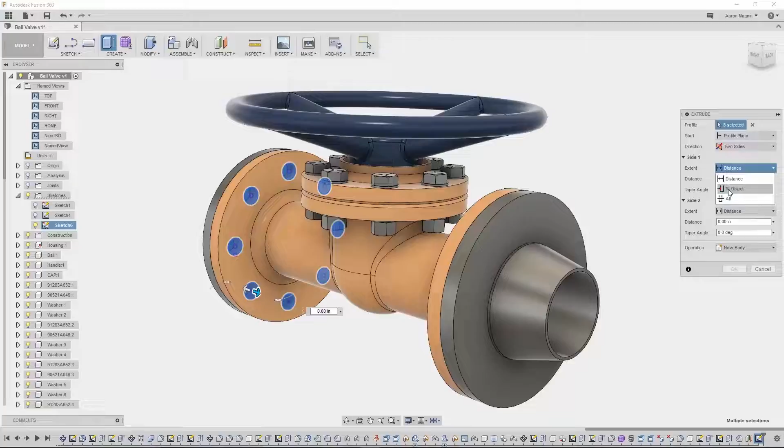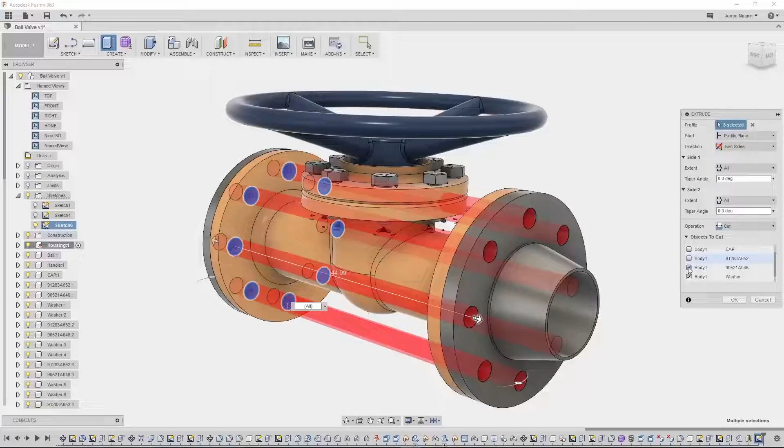To avoid doing this feature twice, I'll have this go in two directions and through all. As it starts to preview, you can see there are a couple of unintended cuts through the valve housing, the cap, and many you can't even see. To avoid these cuts in the past, I would either need to do this in two separate features or hide everything I wanted to avoid cutting. But now, thanks to the Objects to Cut toggles, I can avoid cutting any of the parts I want to leave untouched. You'll find Objects to Cut in revolves, sweeps, and lofts, so you can avoid tedious hide/show steps and make those features more efficient.

But even those tedious hide/show steps just got a lot easier thanks to some amazing new selection tools. Select by Name is especially handy in this case because all my McMaster hardware starts with 9. Select by Boundary allows me to make a handful of boundary shapes, and I can select inside, outside, or even intersecting models.

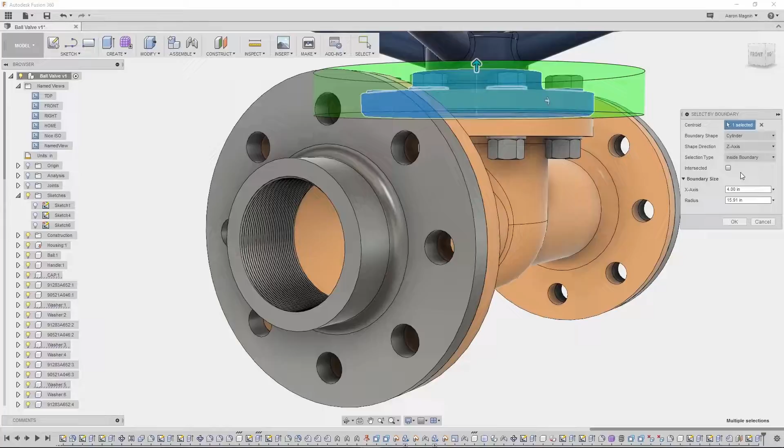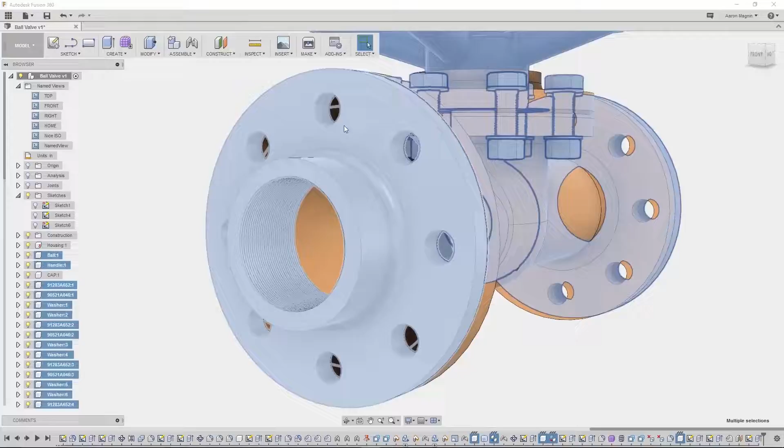I've already used Select by Size to remove hardware and small bits from an insanely over-detailed design by our very own Jay Tedeschi. There are also selection priorities, which can be set to bodies, faces, edges, or components. I'll use components here to get just the housing and the cap, then use the final selection tool, Invert, to select everything but those two items. Hitting V will hide everything but the housing and cap, making the next design changes simple. A great tool to have.

But let's pass over to Bryce now to see what's new in the CAM workspace.

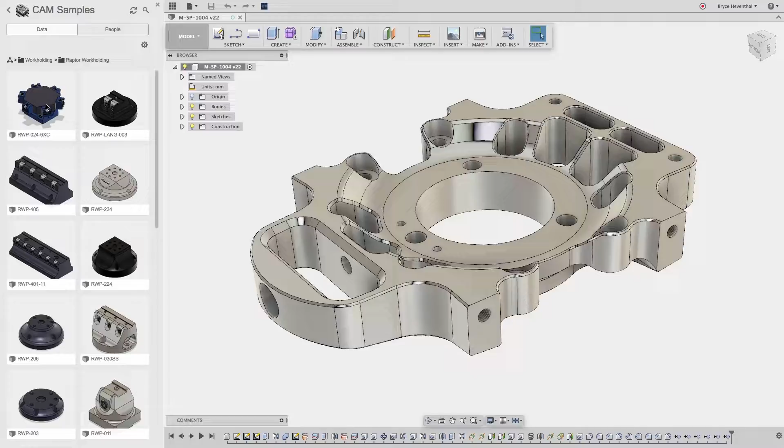In this Fusion 360 update, we have a lot of big enhancements to the CAM workspace inside Fusion 360. To start off, we have added different samples of work holding that can help you with your CAM setups. We have added examples from 5th Axis, Raptor, Chick, and more. We will be adding even more work holding samples to this folder as they become available, so keep checking back in. Now start placing your parts in the vise you are using in your machine to make sure there are no collisions with the way you are fixturing your part.

Next, we've added 3 new tool types to the CAM tool library. In this update, we can now create and customize tapered ball end mills, face mills with a corner radius, and thread mills. Now our next CAM enhancement brings probing to Fusion 360.

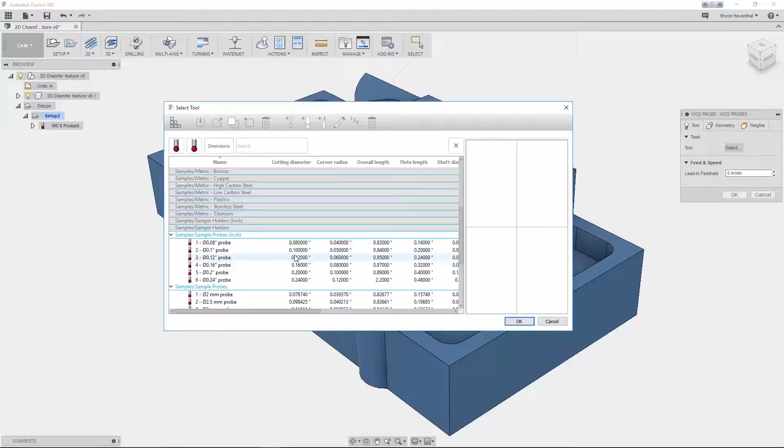Probing can be used to set your zero points on your part and also can be used to find coordinates on your part. First, we will select our probe from the tool library. Probing is something you do at your machine. Next, let's select the probing surfaces. Then Fusion 360 will determine our probing type depending on our selection. You will also need to make sure probing has been added to your post-processor.

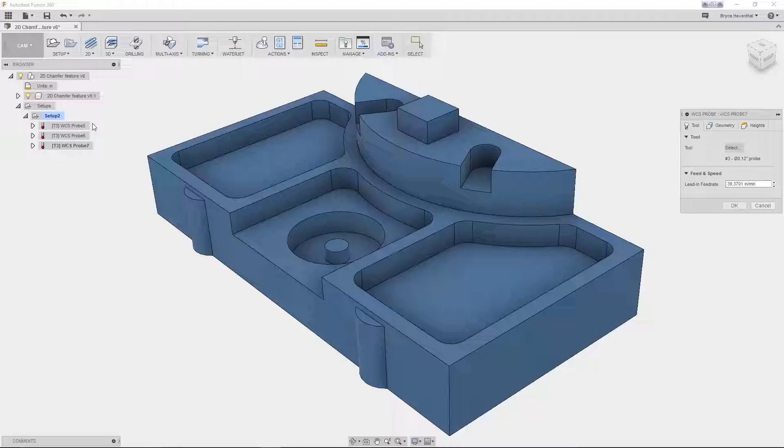Now, depending on the selection, you will get different probe types to locate different points. In this last example, we will choose to have the probe type of an XY circular hole with an island in order to avoid this center extrusion. Let's change the clearance to ensure we don't collide with this circular boss. I can set the clearance to specify the distance that the probe will stay clear from the selected feature. This is the point it rapids to at a distance from that wall.

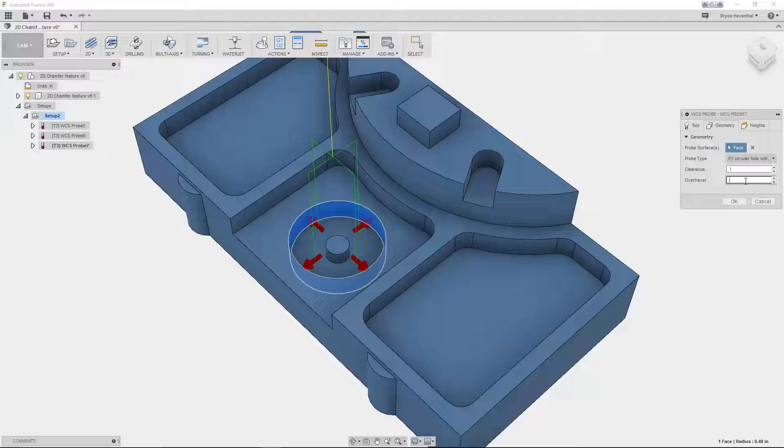The over travel is the distance the probe is allowed to move to search for a contact. We don't want to damage the probe, so if the probe travels the specified distance without finding the wall, it will stop.

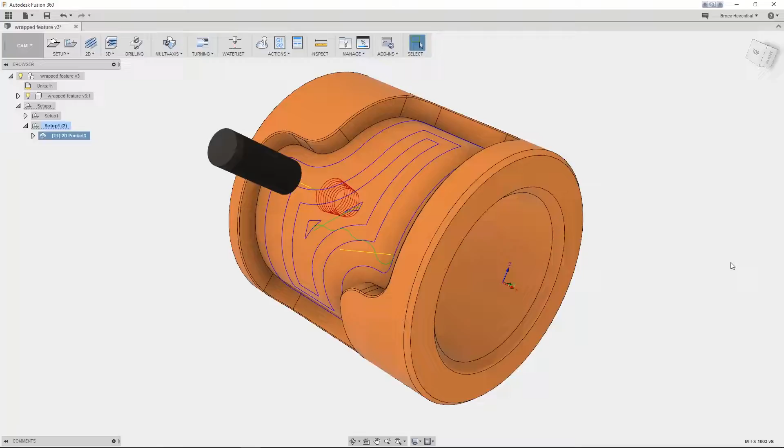Now let's talk about some of the new 4-axis simultaneous toolpaths in this Fusion 360 update. This toolpath will be essential for machines with a rotary axis. We now have a wrap option in the 2D adaptive clearing, 2D pocket, and 2D contour toolpaths in order to wrap around cylindrical objects. The wrap toolpath is a new option on the geometry tab of these toolpaths.

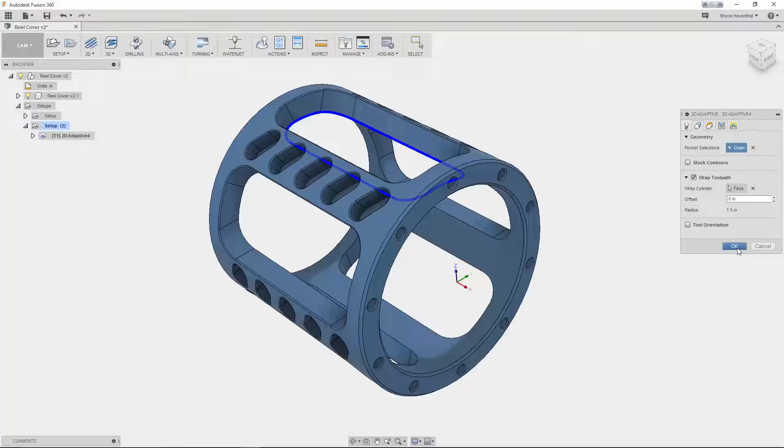Once enabled, let's select the outside diameter. Notice the radius is automatically populated. Now, just as with any other 2D adaptive toolpath, we can select the edge to determine the distance that will be roughed out. Once Fusion 360 starts calculating, behind the scenes it will unwrap the selected boundary, then apply the toolpath, then rewrap it correctly on the cylinder.

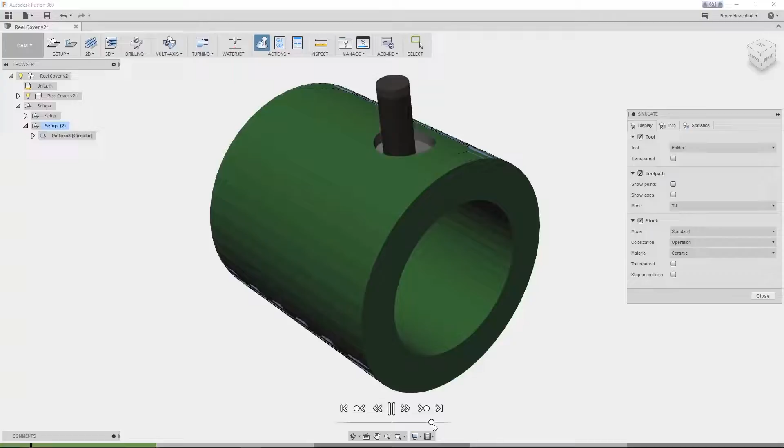In this example, we have several instances of this pocket. Rather than programming each pocket manually, let's use a circular pattern to ensure this roughing strategy cuts all 5 pockets.

Now let's move on to some of the new 5-axis simultaneous machining strategies. Our first strategy will be the new tilting option in the 3D contour toolpath. The tilting option will allow me to use a shorter, more rigid tool and get deeper in the pocket without colliding with the part.

Notice that the tool I select has a holder. Since I definitely don't want that to collide with the part, I will also turn on shaft and holder detection. Tilting will now take the holder into account when moving deeper into the pocket.

Now let's move on to the Passes tab and select multi-axis tilting. When this option is checked, the tool will start to tilt when required to avoid a collision. We can input values like maximum tilt and maximum segment length to control the tilting.

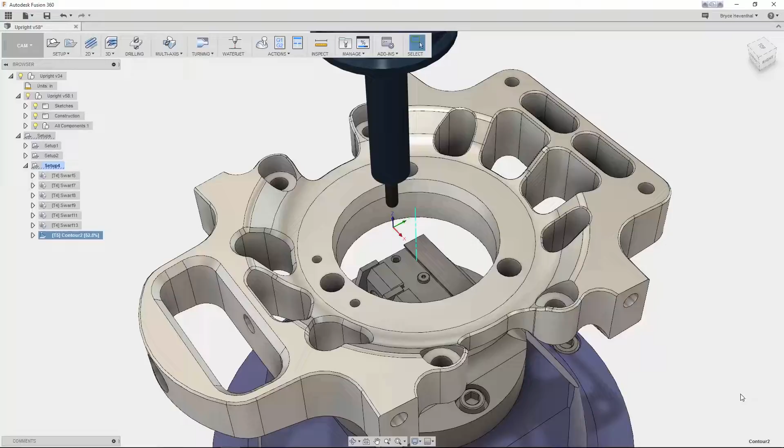Now the tilting option adds more time to the toolpath calculation. Luckily, Fusion 360 CAM is multi-threaded, so we can continue working on other toolpaths while this is being calculated. Notice in the simulation, we can see the tool start to tilt when the holder is about to collide with the part.

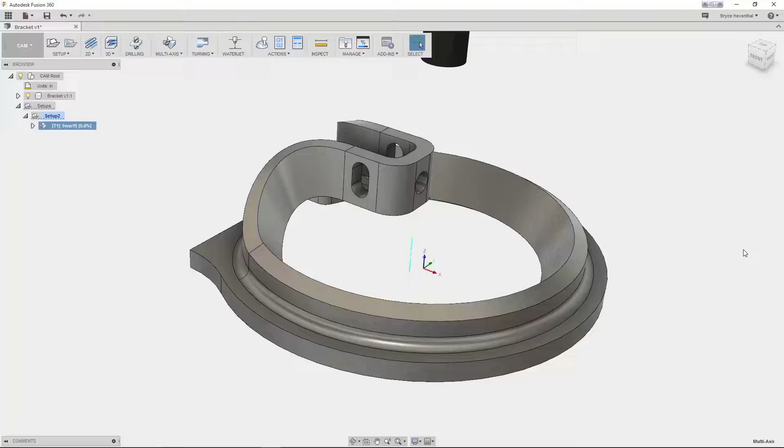Next, let's move on to the swarf strategy, which is another 5-axis toolpath. Swarf is a side-cutting toolpath. This will use the side of the end mill to cut the selected surface. This toolpath is great for beveled edges and tapered walls. Swarf cutting uses the whole cutting length of the tool, resulting in better surface quality and shorter machining time.

To machine these surfaces with a 3-axis strategy would require multiple passes with a ball end mill, which would increase the machine time significantly.

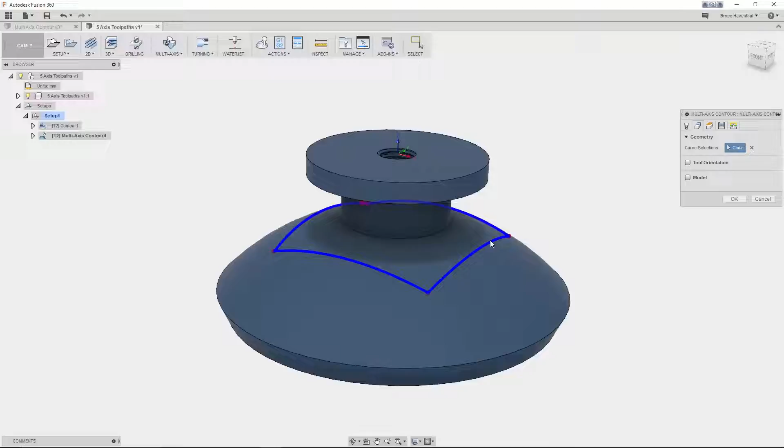Now, our last 5-axis machining strategy for this update is the new multi-axis contour. This contour will tilt the tool along a chained 3D profile drive curve, making it ideal for generating 5-axis toolpaths for deburring, trimming, and engraving on a 3D surface. Initially, the tool will move normal to the surface, but lead, lag, and sideways tilt can be specified to engage different portions of the tool.

We're bringing probing, 4-axis, and 5-axis toolpaths to Fusion 360. That's going to open us up to even more machines we can program. But I hear you've got something to show us here, Aaron.

Yeah, I'm going to be showing simulation, and one thing I need to note from the get-go is that we've standardized on the Nastran solver, very powerful stuff, and we've effectively doubled the number of simulation types you have access to. So let's take a look at some of this power.

Okay, there are a ton of new things I need to talk about in regards to simulation functionality. To kick it off, I'll use this GE jet engine bracket model that was part of an online design challenge. In that challenge, they described multiple loading conditions and also described the constraints to be in the form of bolts. Previously a limitation, now Fusion 360 allows me to use bolt connectors to more accurately constrain this model.

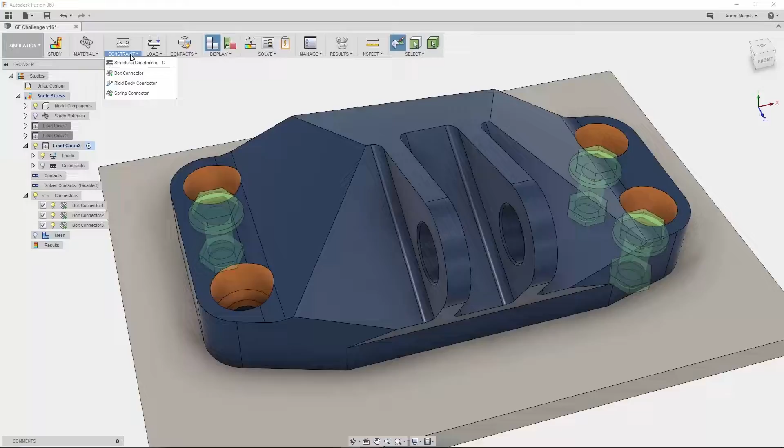These bolts can be defined to be connected via thread or to a nut, and can account for things like washers, and don't forget the so important preload. In this case, I'll define this from a Fastenal reference, a great resource for information of this type.

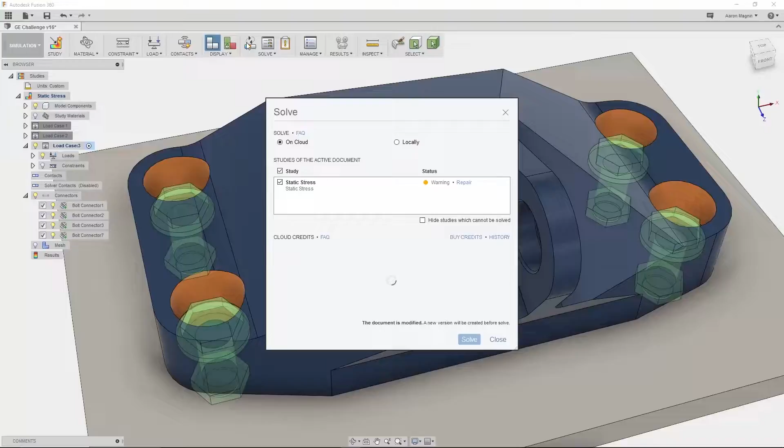From there, this is ready to solve, as all the load cases reference those 4 connectors, and in a short time I'll have results to use to drive the next design iteration.

Due to the multiple load cases, I can choose to view each by using the dropdown, but what would really help is to see the different results at once. Good thing there's a new compare workspace, which allows me to do just that. I can compare up to 4 different results by using different layouts, and what's showing in each window is customizable.

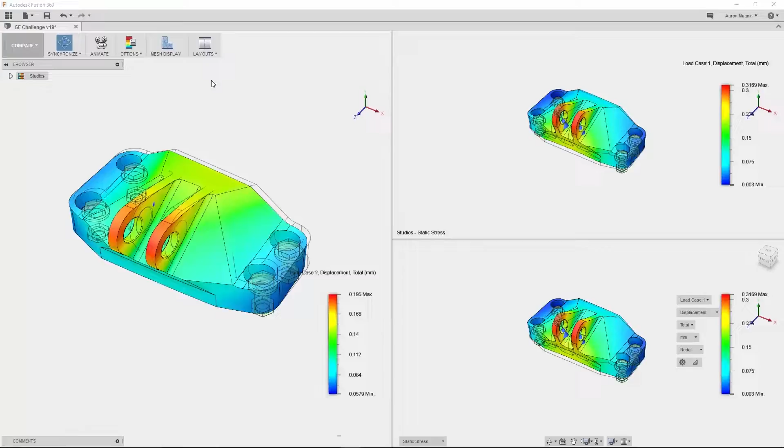Whether you show different results from the same load or show one result across different load cases, it's up to you. Comparing is made easier with the ability to synchronize the camera views, results, and even scaling. This compare tool brings an exciting addition to Fusion 360.

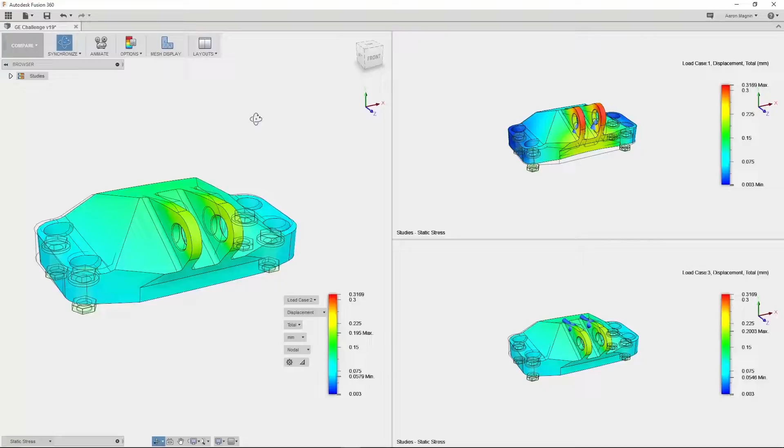Speaking of synchronizing, did I mention all of Fusion simulation is now using the Nastran solver? By doing so, this adds tools such as the bolts you just saw, but it also adds a plethora of new study types. Here you can see a buckling study.

This water tower has a couple of different buckling mode shapes, but the most important to me is the first, which by being less than 1 indicates this model will buckle under the intended load.

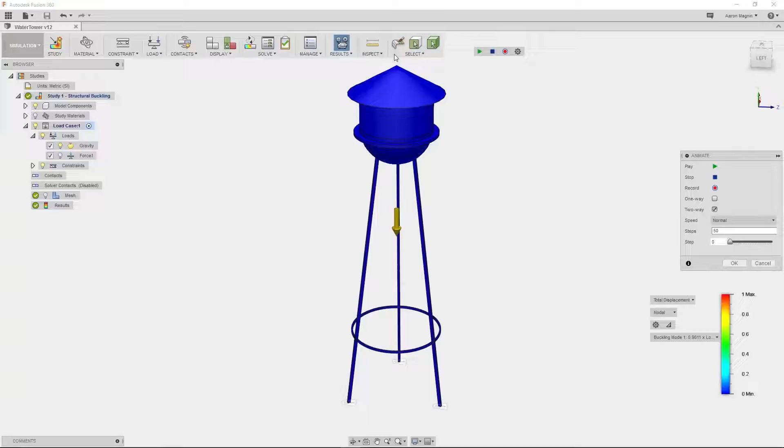To understand how it might buckle, an exaggerated animation always helps. Armed with that knowledge, let's make some design changes to help stabilize this. An additional brace and leg might do it, and after a quick rerun, the results come back, and that buckling load factor of greater than 1 is a welcome sign.

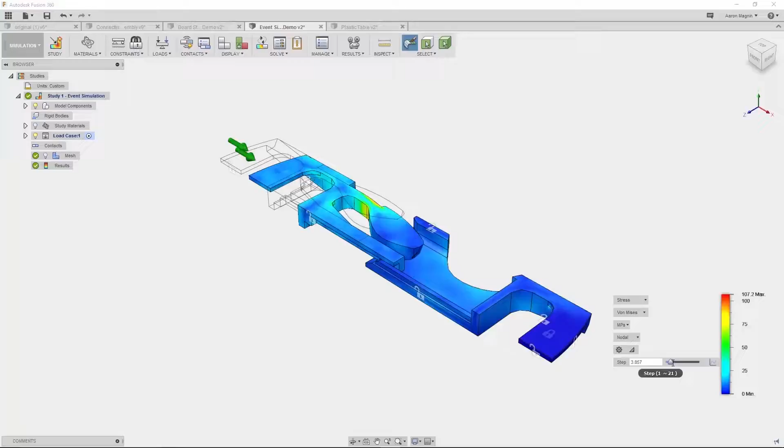If you have transient loads, you can use event simulation. And with the ability to delete elements, you can get some real groundbreaking results. Sorry for the lame pun, but another use case might be something like this buckle.

As I animate through the steps, you can get an idea of how stress and displacement change as it goes from rest to close and back again. And information for each step is saved out and easily accessible.

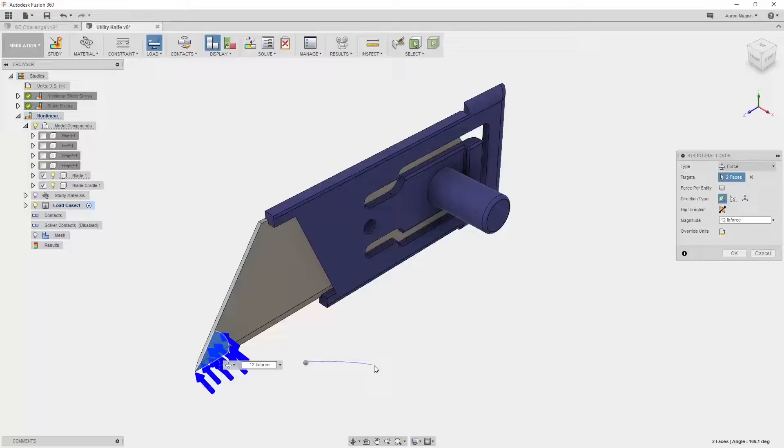Similarly, let's look at solving a nonlinear problem that everyone finds annoying: bent utility knife blades caused by misuse, such as when someone uses it as a flathead screwdriver. With just 2 components being analyzed from a larger assembly, it might seem contacts would be few and far between.

But when I automatically create those, I get more than I bargained for. The new Contact Manager makes it easy to find and alter those. As I select them, they'll cross-highlight in the graphics area, and I can individually change these to the right contact type. To help get better results at the tip, let's make the mesh really fine.

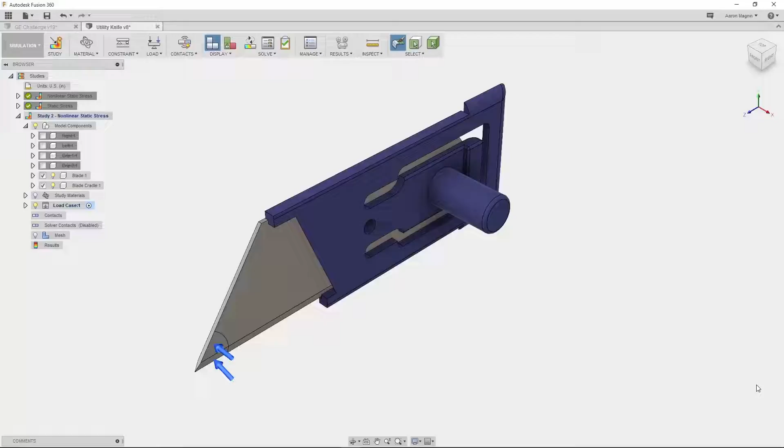With the latest update, I no longer need to adjust the mesh globally to capture that detail. I can instead use a local mesh control found in the Manage dropdown. This allows me to specify faces, edges, or bodies to refine just the area I'm most interested in.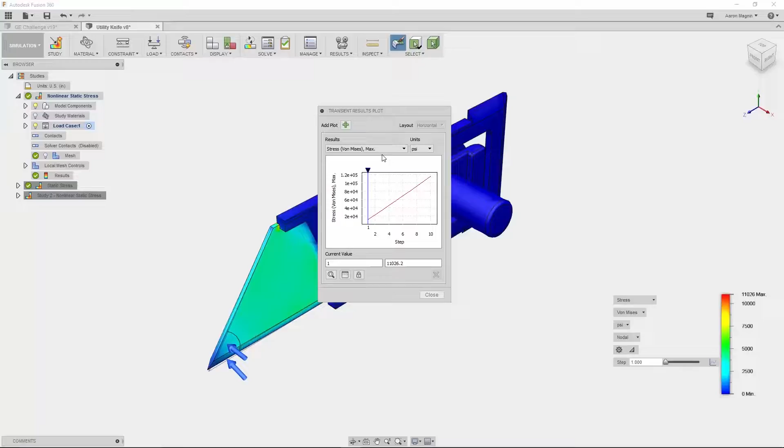With the results back again, I'll have the ability to view step by step what happens with this, which is important with nonlinear problems, as sometimes the nonlinearity is in the form of large displacements, changing contact, or post-yield material behavior. To further interrogate this, the last thing I'll do is probe the stress along the face, which, please note, will be found under the Inspect dropdown.

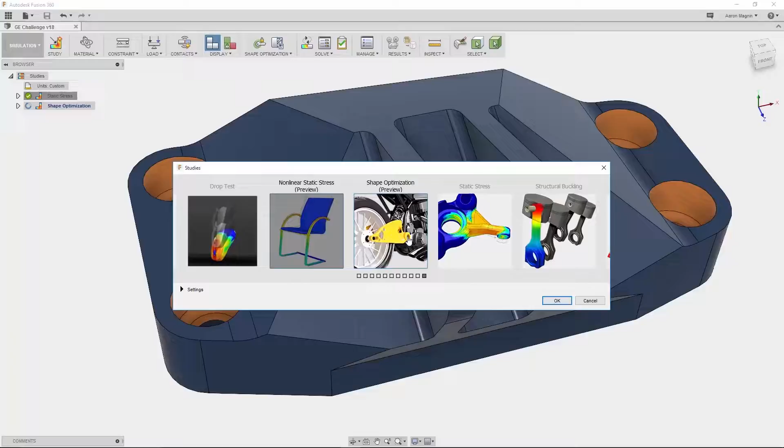But back to the jet engine bracket, let's use a study I am so excited to use, especially in cases just like this. Instead of going through tens or hundreds of design iterations to optimize the shape to handle the load, why not just have the software do it for you using a shape optimization study?

Using this shape optimization, I can set goals, such as reducing the weight to 20% of the original while maximizing stiffness. And I can even preserve regions to maintain areas that might need to connect to other parts, like this cylindrical region, which is easy to manipulate with press-pull handles.

But something to consider is that any faces with loads or constraints will automatically be preserved, which makes complete sense.

If anything I've said doesn't make sense, make sure to check out the new Getting Started tutorials within the simulation workspace. These will allow you to learn all about how, and more importantly when, to use the different study types. But let's see this optimized shape.

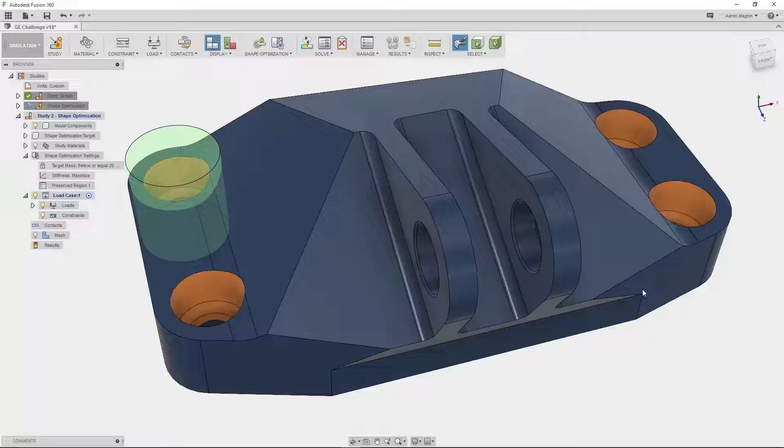Luckily, I don't have to wait much longer, because the entire time I was showing you the shape optimization setup and Getting Started tutorials, another study was solving in the cloud. Gotta love that. Not new, but I use it all the time. Anyway, once it finishes, I can view the load path results to start to visualize the optimized shape.

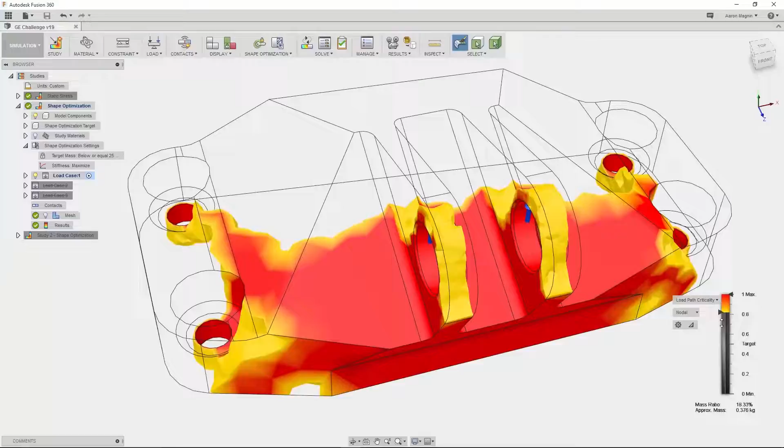But let's go beyond visualizing it. Let's promote this to a mesh body. Now I can use the mesh workspace to drive the design, or take this and make it more machine friendly.

In this update, we have several key enhancements that will extend the capabilities of the drawings environment. First, to consolidate with the rest of Fusion 360, we have added a browser to the left side of the drawings environment. Here we can expand and see the assembly structure used in the design. Notice that there's only one assembly icon in the browser for the Hewland FTR.

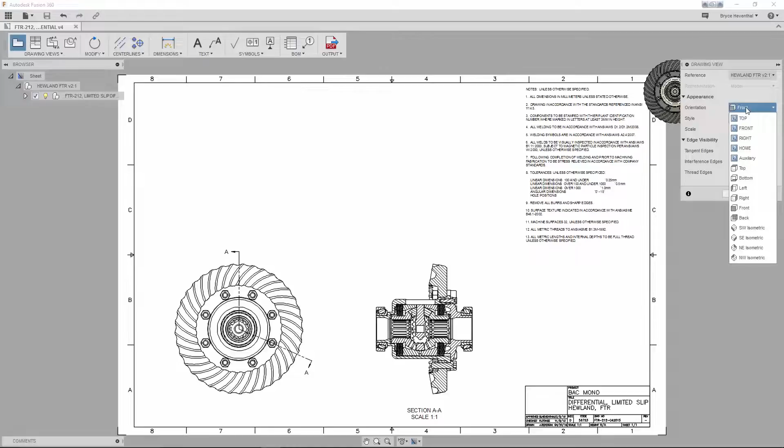Now, when a new base view is created, it will ask for a reference. We have the option to tie this view to the existing assembly in the browser or create a new one. In this case, we will tie it down to the existing assembly design. Now notice when I suppress components from the browser, the component is suppressed from all the views.

Now let's create another new base view. In this case, for the reference, we will choose to create new. Once the view is placed, you will notice that we have a second instance of the Hewland FTR design in the browser. This can be independently controlled from the previous three views. Note that for projected, section, and detail views, they will automatically inherit the parent view's assembly design in the browser.

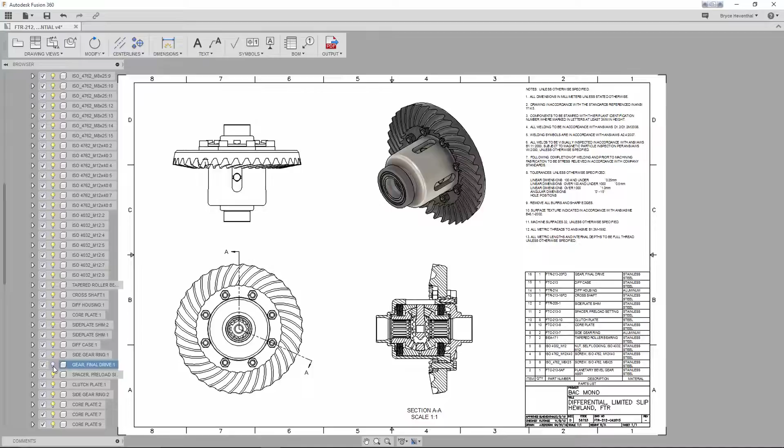Now let's create a parts list of the isometric view. Note a parts list can be created for both assembly items in the browser, and they can both be controlled independently from each other. Now, I want this outside gear final drive to not be in the view, but still appear in the parts list.

In this case, I could hit the light bulb next to the component to make it hidden in the view but still in the parts list. Notice when I hit the checkbox now, it will change the parts list and remove that component. The checkbox suppresses, where the light bulb hides and shows.

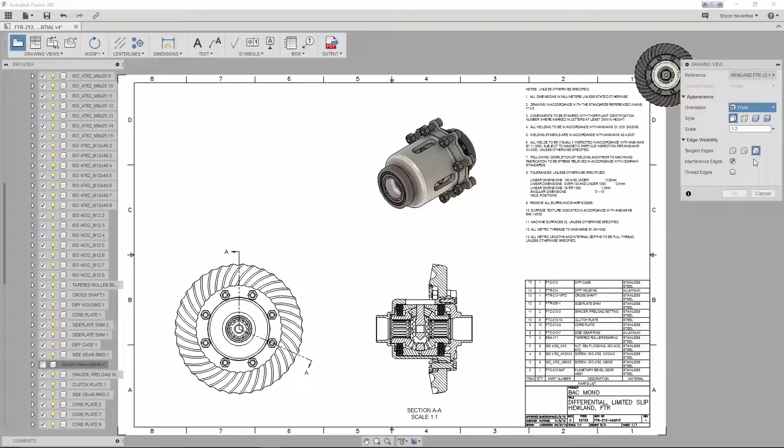Another way to create complex views in drawings is by using named views. Previously, we were able to use named views in drawings, but now in this update, we can tie dimensions, center marks, and center lines to named views. This is an excellent workflow to create auxiliary views.

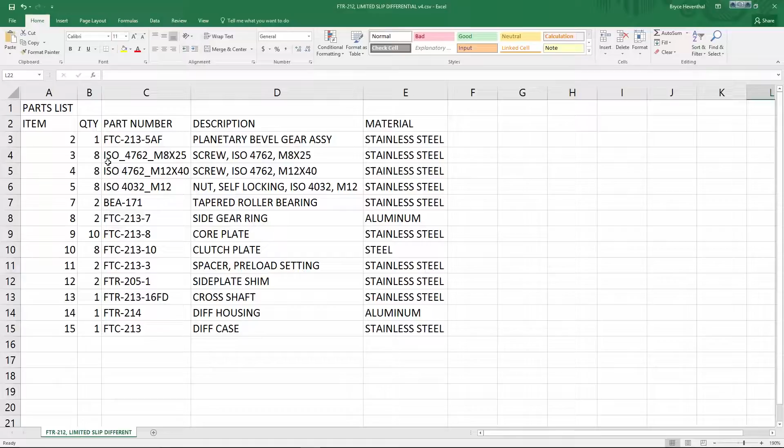Now, this next enhancement is one of my favorite nuggets in this update. We can now export the parts list in a CSV file to use in other processes of the company.